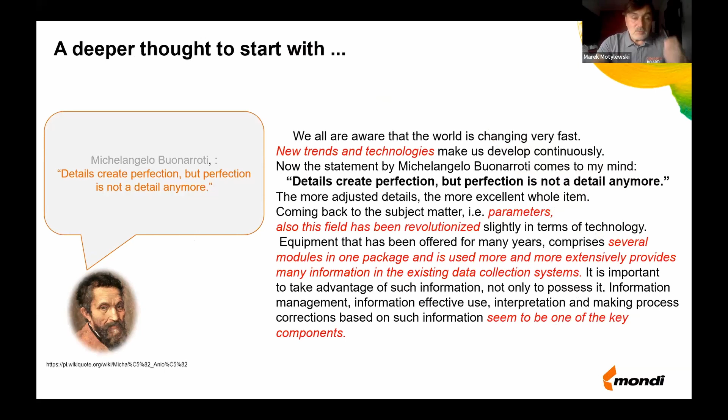Quite often I start my presentation with a sentence which I like very much, written by Michelangelo Buonarroti, that details create perfection, but perfection is not a detail anymore. The more we know, the better we are, more perfect, more efficient, etc. Still a very valuable sentence, good to have in mind, to remember that every small aspect is important, considering a total process, where every detail may create or support us on the way to perfection.

So in this presentation, I intend to share general information with all of you on how to read and interpret parameters in terms of good paper and paper packaging runnability and strength.

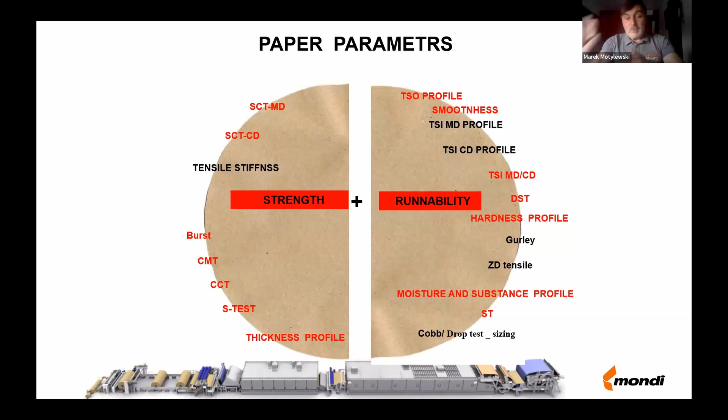On this slide, I put, I suppose, all or almost all paper parameters, and I was trying to divide them. On the left side, paper parameters related to strength, to performance of packaging, and on the right side, the parameters which tell us more or less about runnability. So let's start with the parameters.

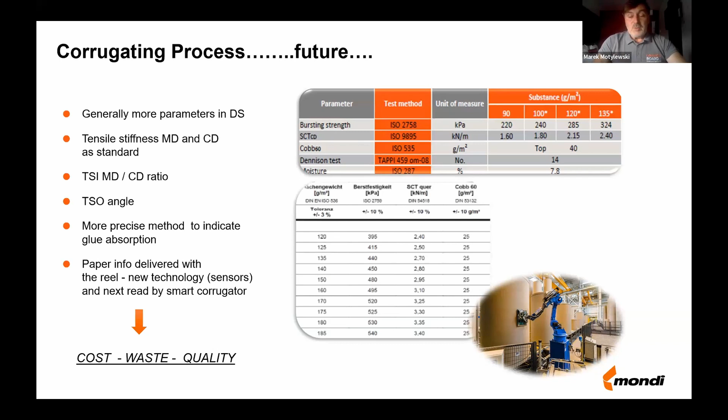And the future, I'm sure about that - the future will, as always, come with new things and new parameters. More complex technical data sheets should be present on the market when selling, presenting paper, to give more information.

Once more, paper parameters - let's talk about some of them. SCT, short span compression test, is the most recognized parameter, I would say, and it's really perfect in case of expressing...

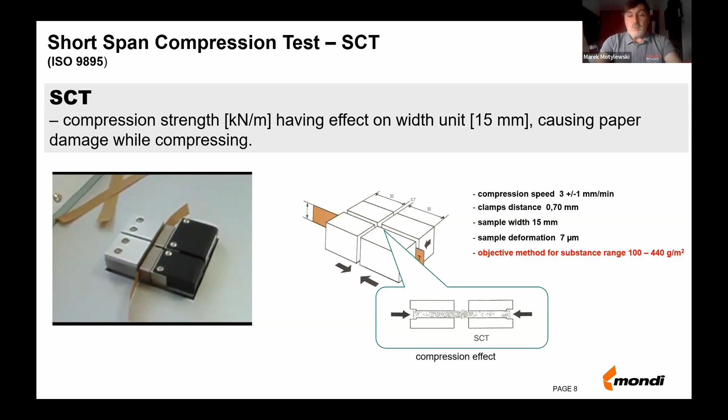Very good methodology because it's covering, as I put on the slide in red digits, a wide range of grammage substances from 100 up to 440.

RCT, ring crush test, is still quite popular, but unfortunately, considering what I told you about SCT, and what I put here on the slide in red digits, this methodology is good as a parameter expressing stiffness, compression, but for higher substances.

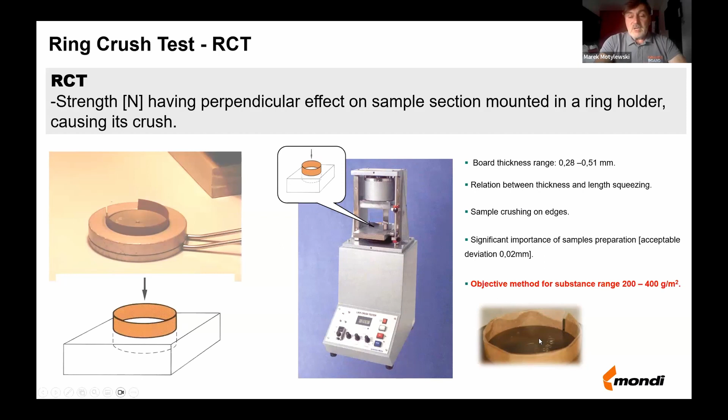RCT correlates with the thickness of paper, so this methodology is good for paper grammage in a range of 200 up to 400. But on the way to lightweighting, more usable, more correct, more precise is SCT, not RCT, because thinner paper creates breaks on the edge of the paper ring, as you see on the photo on the bottom right side. So below 200 grams, RCT is not really a good parameter if someone is still using that.

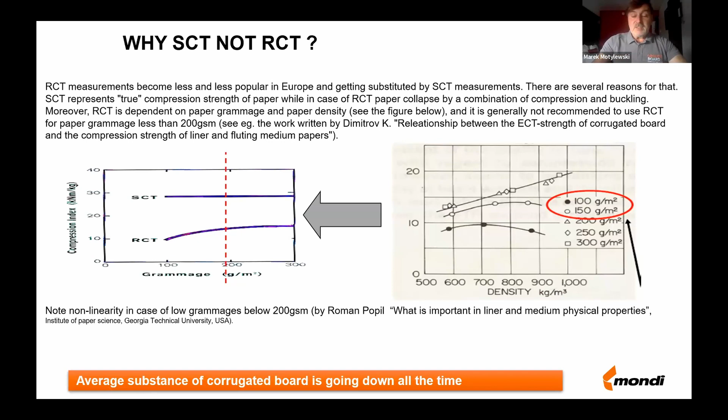If someone is making any prediction of a corrugated board or boxes, it's better to use SCT, short span compression test, not RCT. Tensile stiffness - which I always repeat is the best parameter, I would say, to describe how strong is a paper in case of how strong will be a box - is tensile stiffness, measured in machine direction and cross direction. You see how it goes on a strip of paper, put into the machine, 2 clamps, and paper is stretched. So there's an elongation going on, plus a force, which at a certain moment will make a break of this paper strip.

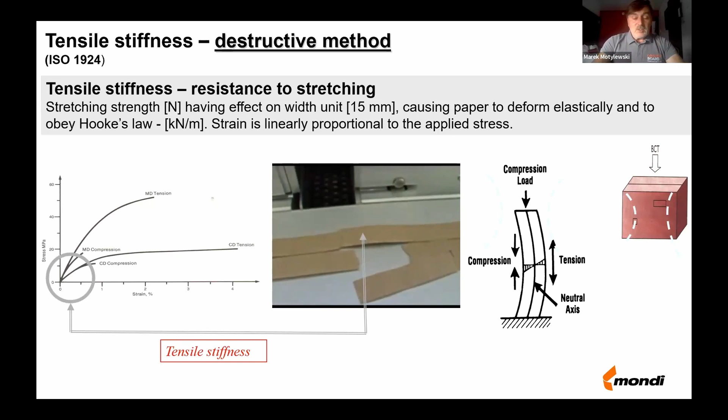So it's an elongation, like elasticity, and the force, which is also a compression. As you see in this drawing on the right side, it's exactly the parameter which shows us very well the case of BCT of a box, where during pressing a box, one side is compressed and the opposite side is elongated - tension is going on. So in this case, compression, tension, elasticity, and the force - tensile stiffness is really the best, in my opinion, parameter covering every grammage and telling a bit more than SCT. Not only pure compression, not pure static stiffness, but also telling us about the dynamic of paper, how high are the dynamic parameters of paper, not only compression.

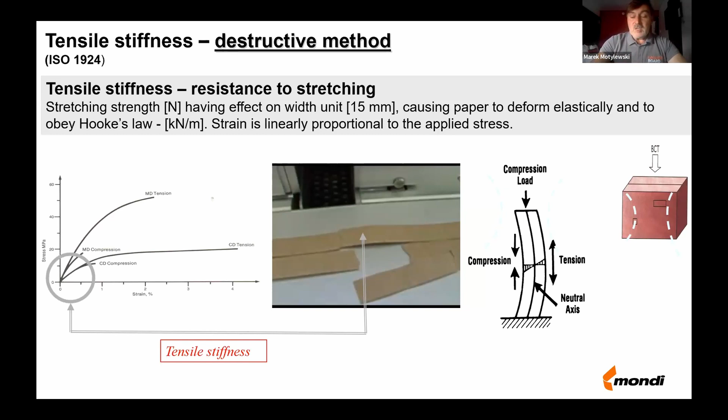Tensile stiffness, machine and cross direction.

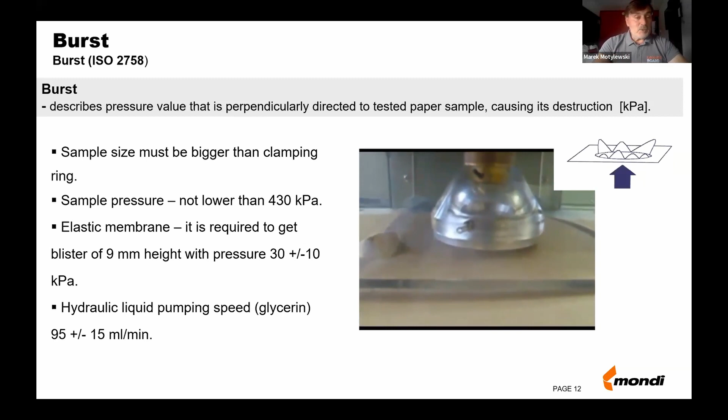Burst - still quite popular, most probably all of you know how it looks like. Still a very simple, good parameter indicating, I would say, content of fresh fibers. It also tells us about the dynamic, not the static stiffness, but the dynamic elasticity. So it's still a good parameter to estimate how strong the corrugated board and boxes will be.

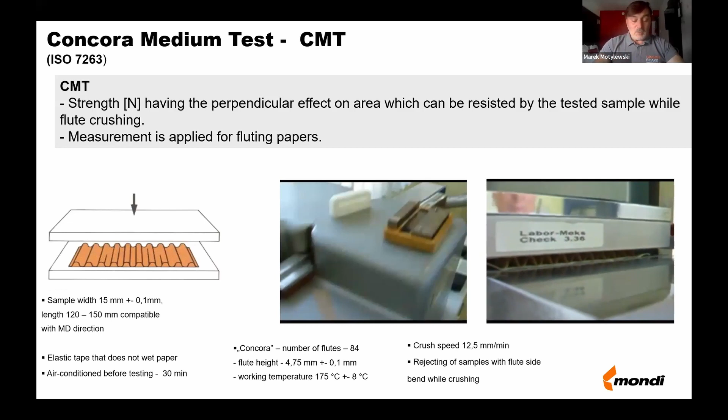Concora Medium Test, so-called CMT, Concora Medium Test - we're just jumping from liners to fluting. CMT, if some of you are doing that, okay, but I would say that is already, in my opinion, a useless parameter. First of all, the methodology comes from the '50s, so it's more than 70 years ago. It's focused on an A flute, which is almost 5 millimeters high. Not so much A flute is produced globally, so it's not really a parameter which is useful, which can be used somehow in any kind of estimation.

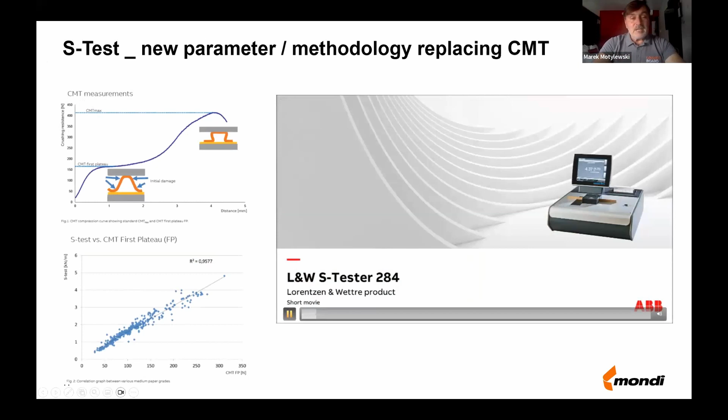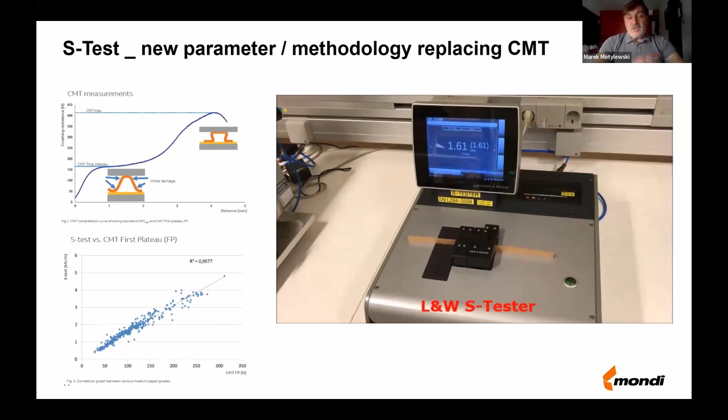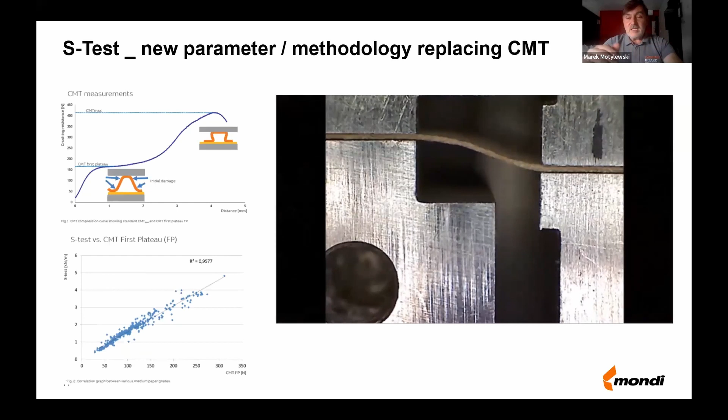In case of CMT, nowadays, or in recent years, a test called S-test started to become more and more popular. It's a new parameter, relatively new - at Mondi we started to use this parameter 3 years ago, and already 2 years ago the S-test became part of our technical data sheet for recycled fluting. First of all, it's very quick - as you see in this short video, it's a similar instrument to SCT, because it's also 2 clamps, 0.7 millimeter gap, and a paper strip is in between the 2 clamps, which get closer to each other when they start breaking the stiffness. Only, as you see very well just now, when a paper strip is tested, it takes the shape of an S.

Because of that, this parameter is called S-test. It has a very good correlation with CMT - not with the total CMT. If some of you are closer to CMT, most probably you know that making a CMT test to crush, to press a flute, which is created on a Concora, involves 3 peaks of performance, 3 times a plateau, so-called, during a CMT test.

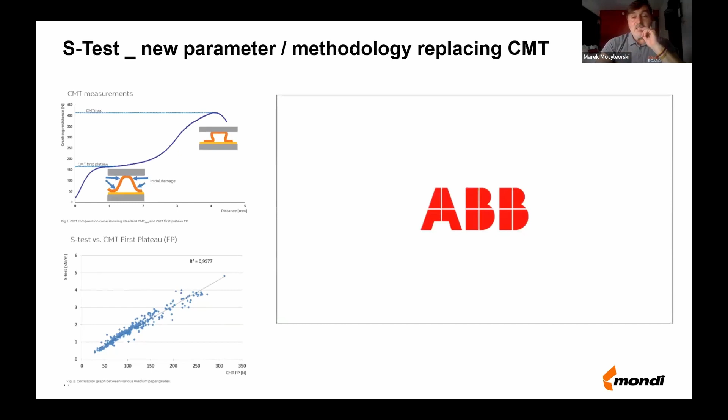So as you see on the bottom graph, that is a correlation between S-test and the CMT first plateau, first peak of CMT. That's a very good linear correlation. As I told, S-test is much faster than CMT, because with CMT you have to heat up the Concora to create a flute, put a cello tape on the formed flute to keep its shape, then put it under a press and squeeze it to get a result. In case of S-test, you just put a strip of paper into the machine and immediately you get a level of S-test.

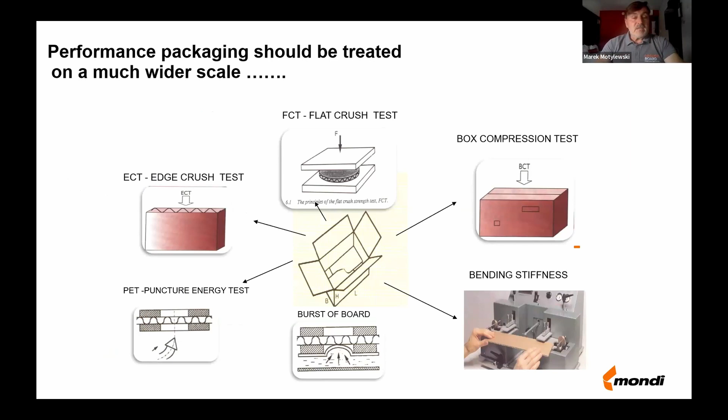Normally considering performance packaging, parameters of board and boxes, we are touching mostly the parameters you see: ECT, FCT, flat crush test, box compression, bending stiffness - not always, but good if it's mentioned - burst, and less PET, puncture energy test.

Shortly, what is this coming from? So ECT, the edge crush test of corrugated board - depends how strong, how high the ECT is, depends on the paper parameters which you see on the right side, which we discussed, which I described: SCT, short compression test. ECT correlates with SCT, or SCT correlates with ECT.

Looking in the middle, bending stiffness of corrugated board - geometric bending stiffness, MD and CD, machine direction, cross direction - depends on the level of tensile stiffness, MD and CD, as I was trying on a previous slide to describe, how complex this parameter is, and that parameter fully corresponds, correlates with the bending stiffness of corrugated board.

And the box compression test, BCT - as you see, I put a question mark on the right side. What decides about BCT? BCT, as you know, is a more complex parameter, so there are more parameters, more aspects which decide about BCT.

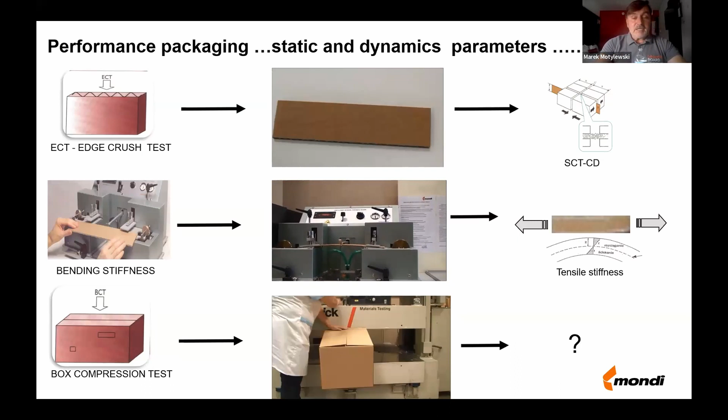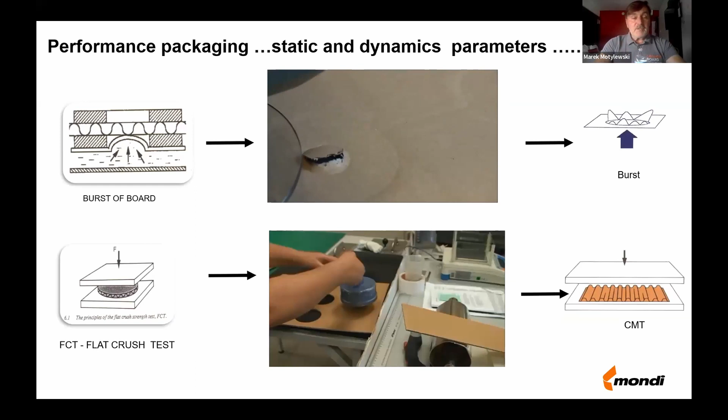Shortly, to complete this - burst of corrugated board uses the same equipment as for paper, only different pressure is used, because corrugated board is a stronger material, so we have to use higher pressure to burst the corrugated board. And the FCT, flat crush test,

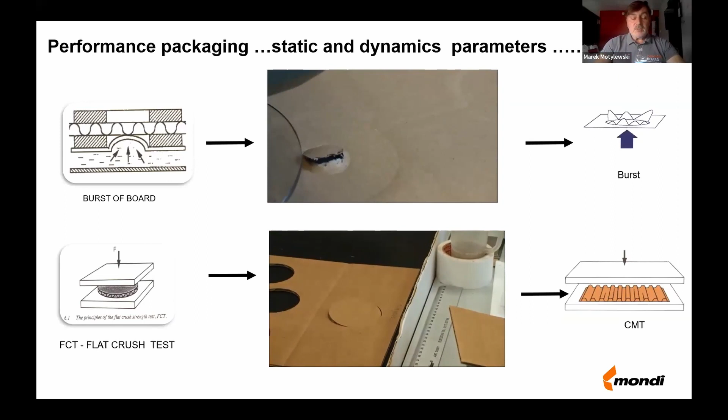depends how strong the fluting is, so it corresponds somehow with the CMT or with the S-test, which I was also trying to describe, to explain to you.

Okay, so in case of paper parameters and their impact on corrugated board, quite often people are saying SCT, ECT, BCT - give me a very stiff paper with a high level of short compression test, that will give me a strong corrugated board, high ECT, and finally BCT. It's a very simple, let's say, performance packaging way, which I don't like, which is not a complete definition of performance packaging.

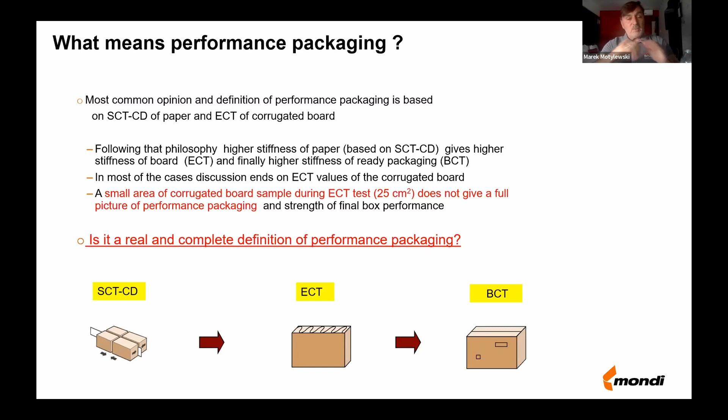First of all, let's consider that the ECT test is based on a very small piece of corrugated board, just 25 centimeter square, 10 centimeter length, 2.5 centimeter high. So it's only a small piece of board, which does not give a full picture of performance packaging and strength of the final box performance.

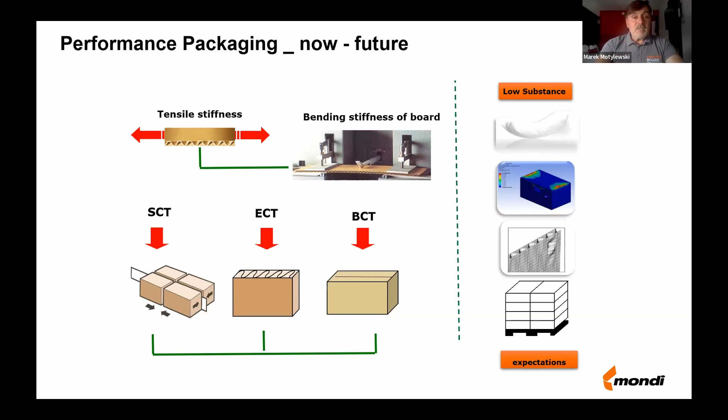It means the expected BCT of a box.

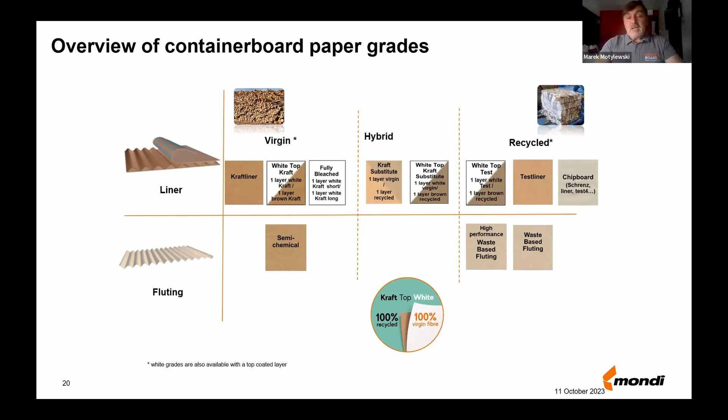Mondi is, by the way, a leading producer of hybrid papers, considering both versions, brown and white.

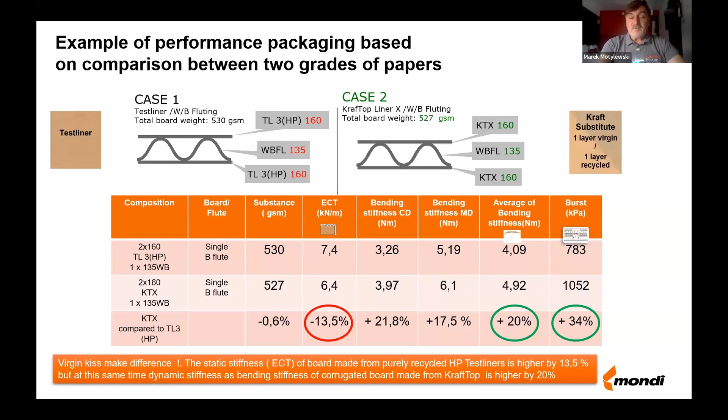But considering partly virgin papers, the bending stiffness, geometric bending stiffness, was 20% higher than recycled, and the burst was plus 34% higher than fully recycled HP. So that gives me proof that, okay, that's only static stiffness compression that's much higher ECT, but considering dynamic bending stiffness and burst, that is a plus for hybrid papers with some virgin fiber content.

We also did a BCT test, and that was the opposite. In this case, ECT, as you remember, was lower for the partly hybrid paper, but in case of BCT, where we put a box under a press and push that down, so it's dynamic, coming with the elongation, the tension.

So that was not so much, but that was a significant difference, that the BCT was higher on the hybrid papers, and also this deformation was slightly longer, which is clear, virgin fibers are more elastic than fully recycled.

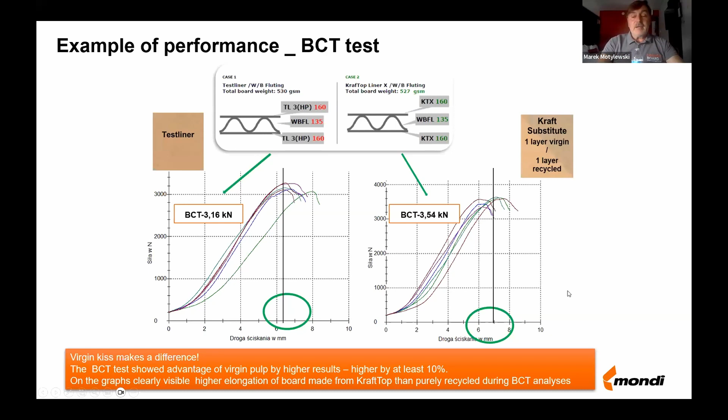So all in all, summary: what means performance packaging? It means correlation of parameters and how strong the corrugated board and the boxes are. So it's not only SCT to ECT, but dynamic parameters should also be considered, tensile stiffness of paper, and bending, geometric bending stiffness of corrugated board.

So all in all, performance packaging is a bit complex, it cannot be treated only based on SCT or only on tensile. It always has to be more in balance, and more aspects have to be taken under consideration.

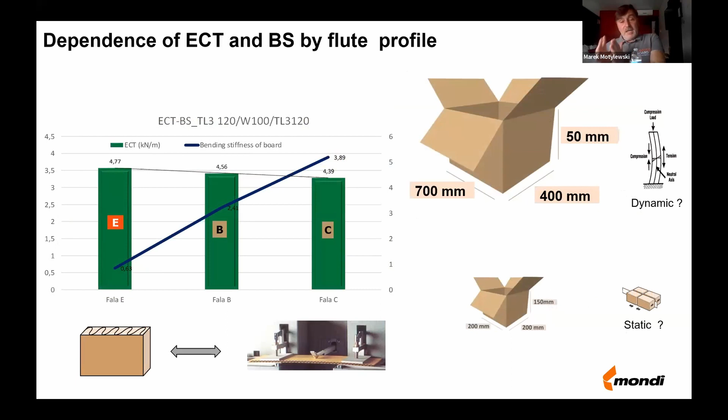So that is somehow a summary of the first part of the presentation, the correlation between paper parameters and strength of corrugated board and the boxes.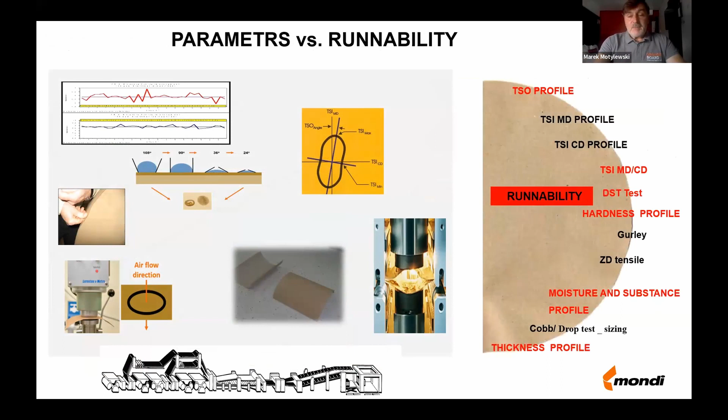So now, second part, related to parameters versus runnability. I will try somehow to describe parameters in a runnability context. Runnability cannot be measured in laboratory.

Really? No, maybe it can. It can. It means, knowing the level of a few or several parameters, we can easily say about runnability of a paper grade in the aim of end-use application.

So considering runnability, what is important? Equal moisture, that we know, equal moisture and substance without variations across and in machine direction, thickness also, no variations across, sizing of a paper, porosity, air permeability, strong bond of paper.

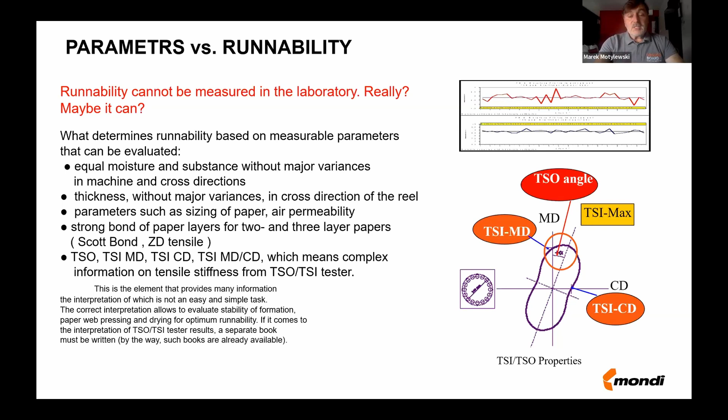Most of liners, let's say 99%, are 2 or 3 layer papers, and it's important to have good internal bonding between the top and bottom layers, so Scott bond, tensile, and also more parameters like TSO, tensile stiffness orientation, tensile stiffness machine direction, tensile stiffness index cross direction, the ratio between machine direction to cross direction, etc.

That everything is possible to check, to measure, and that tells us more about the runnability of different papers. And knowing more, we come back to the starting point, a sentence of Michelangelo Buonarroti: knowing more, our prediction is better, we are more perfect.

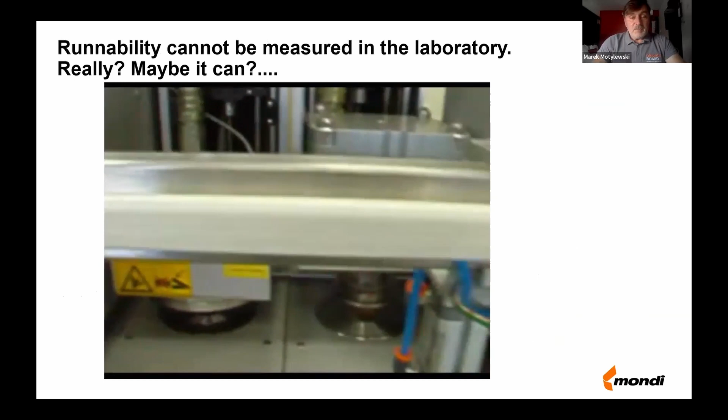Nowadays, in a paper laboratory, which is also slowly coming to the corrugated side, we have a testing machine which is so-called autoline.

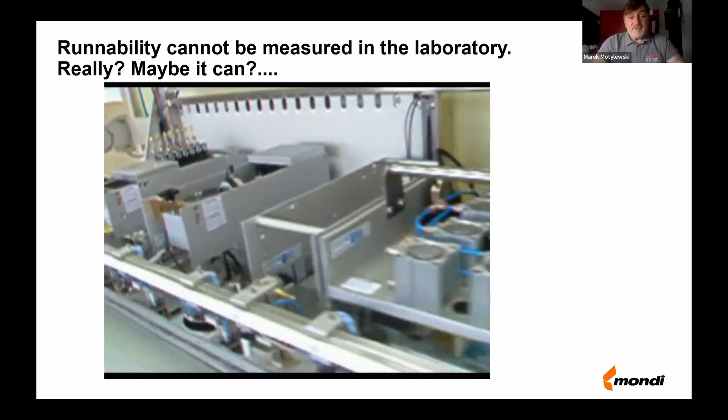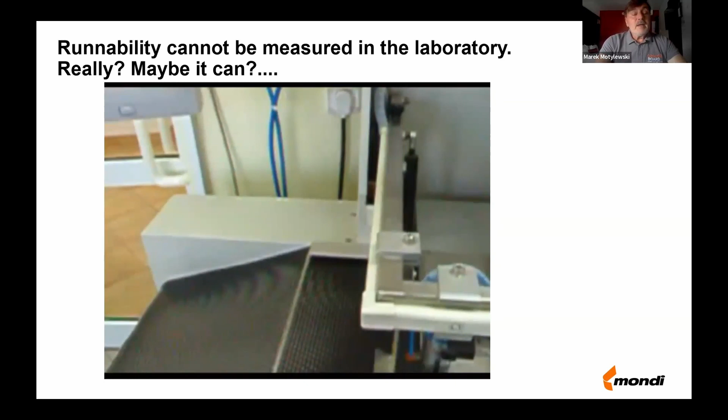A few or several instruments under one cover, depends how much money you want to spend. Paper is going through, paper is tested, and there's automatic data transfer to the system. Parameters like burst, TSO, SCT, tensile stiffness, everything is measured. It can be physical and ultrasonic, so destructive, non-destructive checks.

But all in all, there are several parameters which are possible to check, and those parameters are telling us about the runnability.

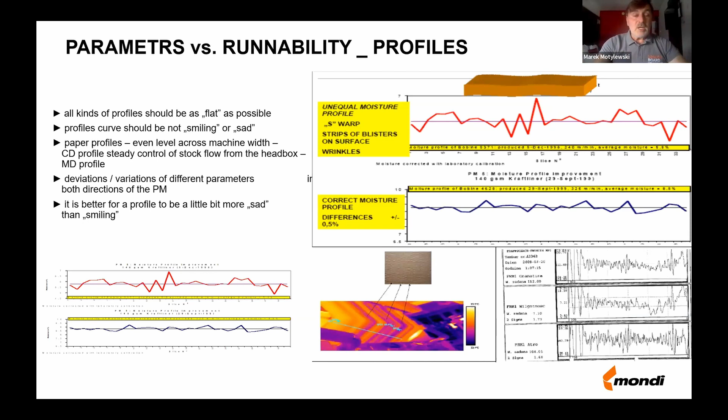The profiles, moisture, substance, thickness profiles should be as flat as possible. The profiles should not be smiling shape or sad shape. It is better for a profile if they are a bit more sad, going down, like a down warping, not like a smiling, up warping shape. That is always a bit better when its shape is a bit sad, not smiling.

Also moisture in machine direction matters, because quite often we only consider profiles across. But also moisture in machine direction, for unwinding, converting a reel on a corrugator, is important. If the profiles are okay, but moisture in machine direction is representing a different level - let's say starting to unwind a reel is 10%, and at the end of the reel is 6% - that's a huge difference. That will be completely different warping, starting and ending with one reel.

So this moisture profile, with a maximum variation of plus minus 0.5, means that the moisture profile should be in a range within 1% across, the same related to machine direction. Also in machine direction, moisture variations should be not higher than plus minus 0.5, within 1%, not more.

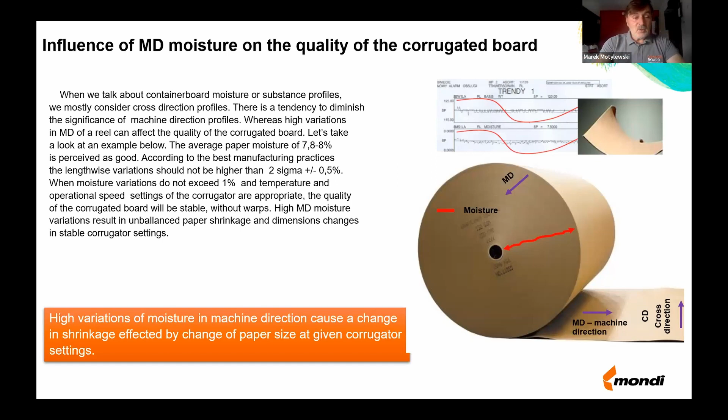In case of proper runnability, it means getting a flat corrugated board at the end. What do we know from the TSO profile? Tensile stiffness orientation profile, which is just a result itself, is telling us, is showing us, the angle, the positioning of the fibers across a paper reel.

The fibers in a perfect paper should be put in machine direction or cross direction, but it's never like that. Always some fibers are put on the wire and later on paper, positioning a bit left or a bit right, which is expressed in an angle. So TSO is telling us an angle - plus 4, plus 5, or plus 10, minus 7, etc.

And if this TSO angle is too high, side to side, if it's higher than plus or minus 5 degrees, that quite often creates a twisting warp of the corrugated board, a kind of warp which you see on the photo on the right side of the board.

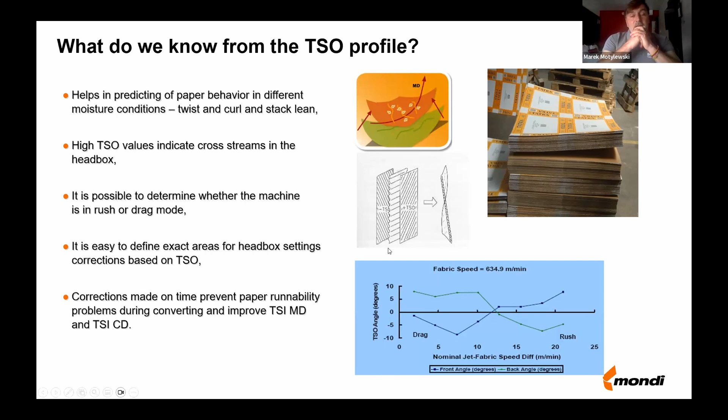TSO, so far you cannot easily find it, or it happens sometimes - some producers are indicating a TSO level in the technical data sheet, but it's really good to know, because that very well indicates what we can expect in case of flatness.

Knowing precisely the TSO from every reel, you are able somehow to make some corrections. I mean, if you have reels with a minus angle, and you put that reel on a single facer and want to compensate with plus TSO, plus angle, you put it on a double backer, the paper will compensate each other. I'll put it here a bit like a mathematical calculation.

If you take two reels, like liners - outside, inside liners - with minus TSO, it's like minus 4 plus minus 4, you will get minus 8. So you will intensify the twisting warping. But if you know precisely, you can put one plus, one minus - example, minus 4 plus 4 is 0. So one reel will compensate the other and will give a more flat or flat corrugated board.

So more information gives us more solutions.

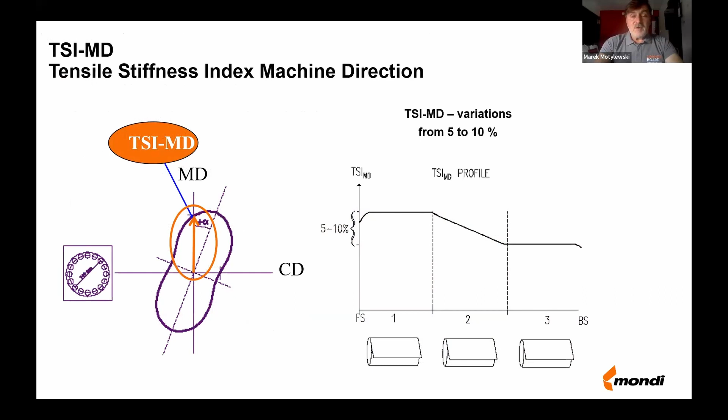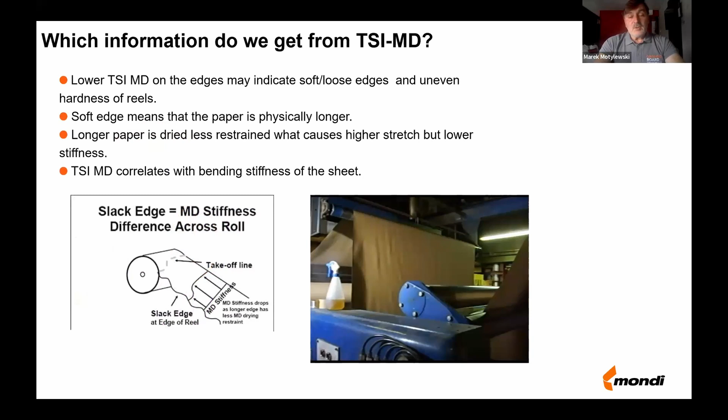Tensile stiffness index, or tensile stiffness machine direction profile, indicates to us if a paper reel's variation of TSI MD is too high, which can tell us that there can be a problem with flop, with a loose edge from one side. So in this case, the TSI MD profile variation should be not higher than 5 to 10%, which tells us that we have a chance not to notice any slack or soft edges.

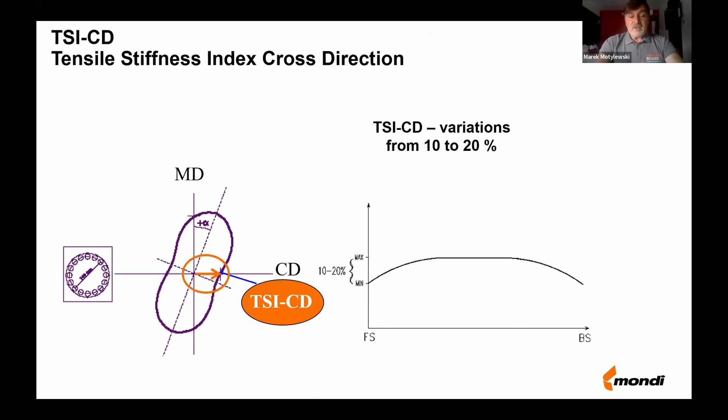The same with the TSI cross direction. In this case, recommendation is that the variations should be not higher than 10 to 20%. Tensile stiffness generally is, as I already mentioned, a very complex parameter in case of prediction of strength

of corrugated board, but also in case of runnability. Most of the cases, it's a non-destructive parameter. It's just based on an ultrasonic pair of sender and receiver going through the paper, giving us the level of TSI CD, TSI machine direction, cross, etc.

Also the ratio - I mentioned that it's important, or relatively important, to know the tensile stiffness machine to cross direction ratio, MD to CD. Why? Because as you may know, paper itself may have a higher or lower tendency for warping, up or down. And how do we know which paper has a higher or lower tendency for warping? The MD to CD ratio, tensile stiffness index MD to CD - this can also be SCT ratio MD to CD - is indicating which paper is a bit better in case of warping.

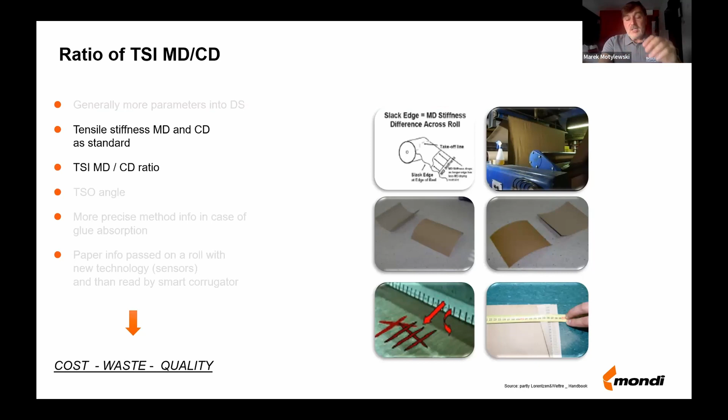Lower ratio means a more flat corrugated board produced based on such paper. Lower ratio is better for runnability. So all in all, TSO wants to avoid a twisting warp.

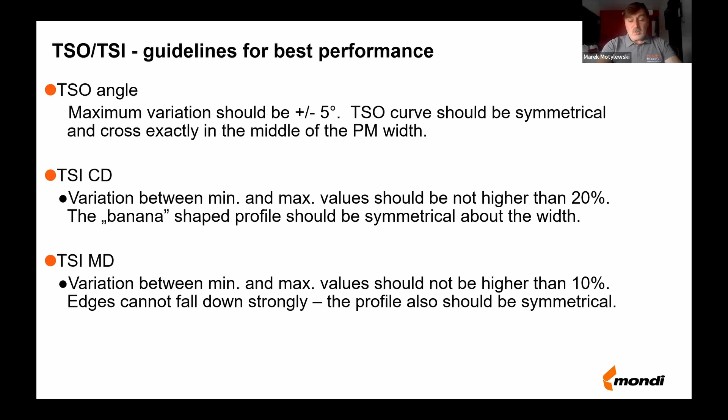Maximum variation should be plus minus 5 degrees, not more. When it's over plus minus 5 degrees, that can indicate that the reason for a twisting warp is the paper. TSI cross direction variation not higher than 20%, and tensile stiffness index profile machine direction not higher than 10%. That is the guideline for best performance.

Sizing of paper - quite often a corrugated board producer is thinking sizing is important. We know how much paper is absorbing glue during production on a corrugator, or how fast it is absorbing ink.

But if you consider the absorption of water during the 60 seconds, both papers had completely different behavior. This gray paper was absorbing much less at the starting point, going up later with absorption. The second paper was absorbing quite fast and a lot during the first second, then slowed down. So Cobb 60 is giving us information on how much water paper absorbs after 60 seconds.

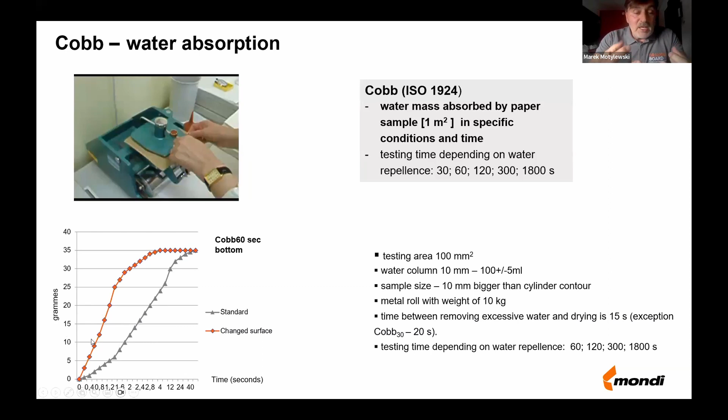Do you need information on how much paper is absorbing water after 60 seconds when glueability on a corrugator happens within a second, and printing is sometimes happening within a millisecond? We need, in case of printing or glueability, information on the paper's characteristics in absorption of glue or ink within the first millisecond or first second.

So nowadays other parameters, like contact angle, or the one I like most, PDA - penetration dynamic analysis - tell us perfectly what the absorption of a liquid, glue or ink, is during the first 2, 3, 4 seconds. This information is most efficient for considering our processes. So in the future, PDA will be more used than Cobb 60, which, once again in my opinion, is completely useless.

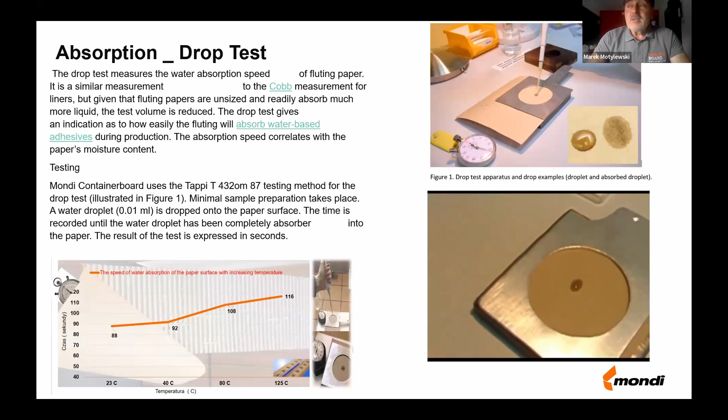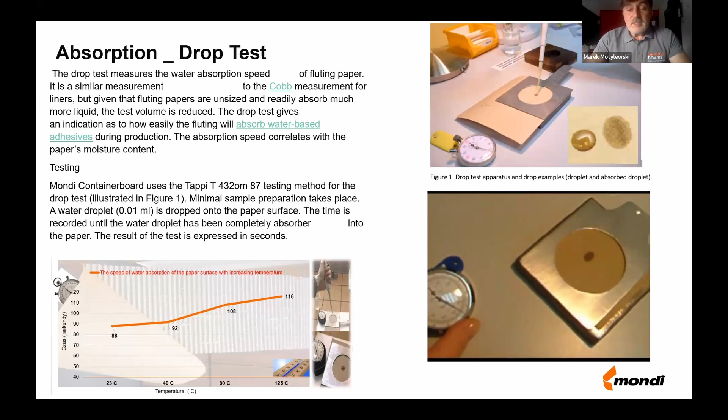A very simple drop test, which you most probably know, is always quite good - quite good to quickly express what the differences are between papers. Putting just a drop of water on a paper surface and measuring the time when this water is absorbed, eaten by the paper, when this water mirror disappears from the paper surface - that's a matter of seconds, a few dozen, and that's still quite good.

Paper delamination, which also from time to time creates a problem. As I mentioned, every liner is a 2-3 layer structure, so it's important that the internal bonding between the top and the bottom is quite strong. One of the best parameters, I would say, is Scott bond, measured in joules per square meter, telling us how strong the internal bonding is between top and bottom.

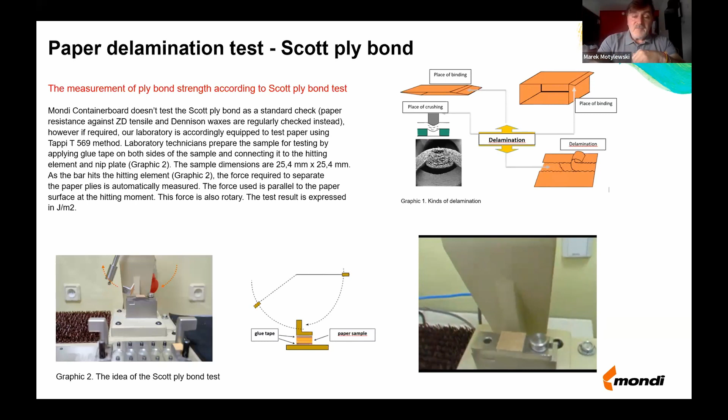Cello tape, two pieces of paper, pendulum just touching a sample of paper, making a break between the layers, and the force needed to break this internal bonding is a level of Scott bond, expressed in joule per square meter. Much faster and relatively good also is something called ZD tensile.

It's a bit of a different story. You may have a look at the animation on the bottom right side, because during a Scott bond test the pendulum is going from one side touching the paper. In this case, it's a Z direction.

In case of delamination, it's also important to know what kind of raw material was used for the paper. We use softwood and hardwood, meaning longer or shorter fibers. Good to know, because with shorter fibers it's a bit more difficult to get a proper bonding. It's easier with softwood.

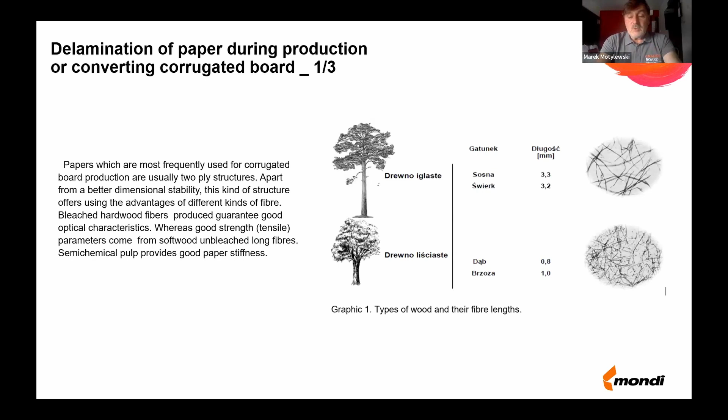We should also keep in mind what kind of paper it is: is it fully virgin white top kraft liner, fully or predominantly virgin brown kraft liner, or kraft top? Kraft top hybrid paper is a good example, because it's a combination of virgin and recycled fiber, which makes it quite difficult to get a proper strong internal bonding. It's always a challenge.

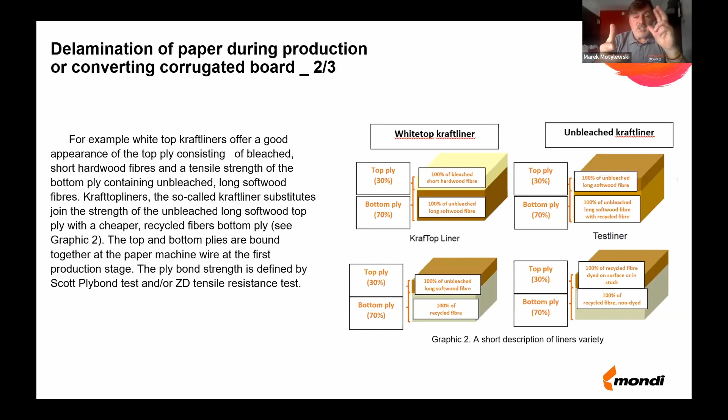So when converting such paper, we should keep in mind to treat it a bit more delicately than fully virgin paper, because the impact of temperature and glue absorption creates a weakening of this internal bonding. So it's good to know whether it's fully virgin, predominantly recycled, or fully recycled, etc., because that has an impact.

On that slide I also wanted to express the impact of converting on a corrugator, specifically temperature and glue absorption. Getting back to the different kinds of paper and raw material, with shorter or longer fibers, when temperature goes up the layers shrink differently. Softwood shrinks more than hardwood, or virgin fibers generally shrink more than recycled.

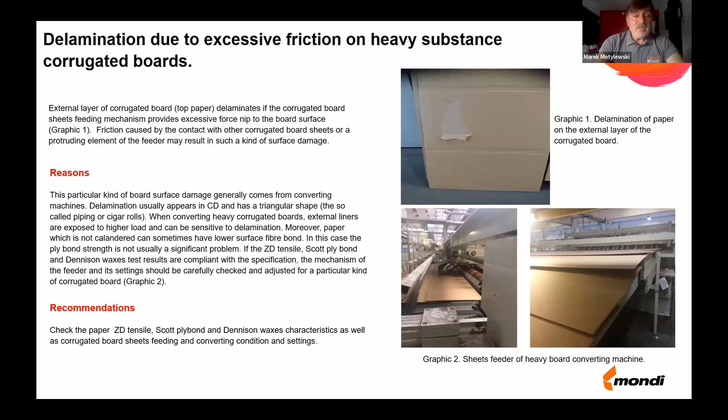That creates tension between the layers and a weakening of internal bonding, which may cause delamination of the ready corrugated sheets. This kind of delamination, so-called cigar or local delamination, mostly appears on heavy-duty corrugated board with higher substances. It can sometimes be due to the settings on a machine or feeder, but also due to not high enough internal bonding between the two layers.

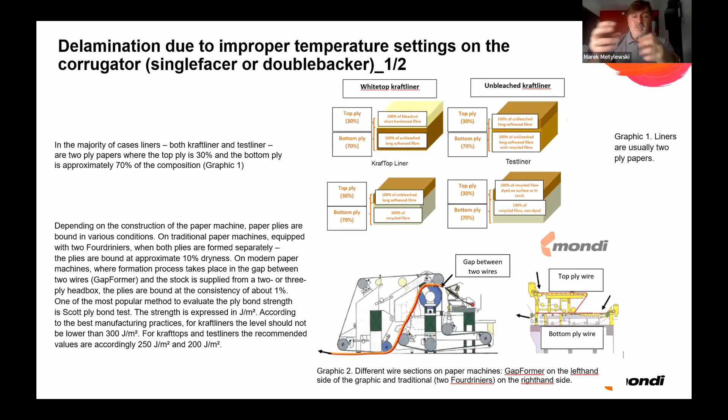Sometimes on a paper machine, the paper is not produced fully properly. For me, it's good to know as a paper maker that we have different kinds of paper machines and different kinds of wire sections, because internal bonding is created on the wire section where wet layers are bonded to each other. So we have standard two Fourdrinier machines, and more and more paper machines based on a gap former. These things have an impact on how strong the internal bonding is.

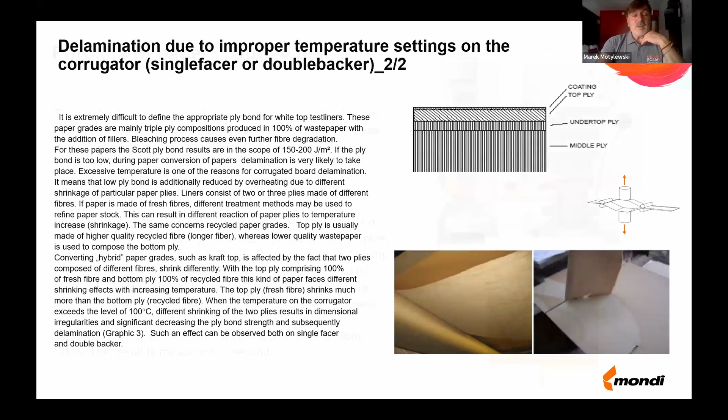The weakest papers in terms of internal bonding, where delamination appears quite often, is white top test liner—fully recycled, with very degraded fibers, because the bleaching process is also involved. Quite often white top test liner has three layers or even four, so internal bonding is not so high. Scott bond is often below 200 joules per square meter. So it's good to know that this paper is the weakest in terms of risk of delamination.

I have to speed up a bit. Porosity of paper, mostly Gurley. Most popular is Gurley, also Bendtsen, but the most popular is Gurley.

It's also important in case of runnability, knowing if paper is more or less open. Very simple methodology telling us how much air. Gurley is telling us directly how many seconds it will take for 100 milliliters of air to go through the described area. It's just a cylinder which is pressing air through the paper.

Shorter time, fewer seconds, more open paper. Longer time, more seconds, paper is more closed, density is higher.

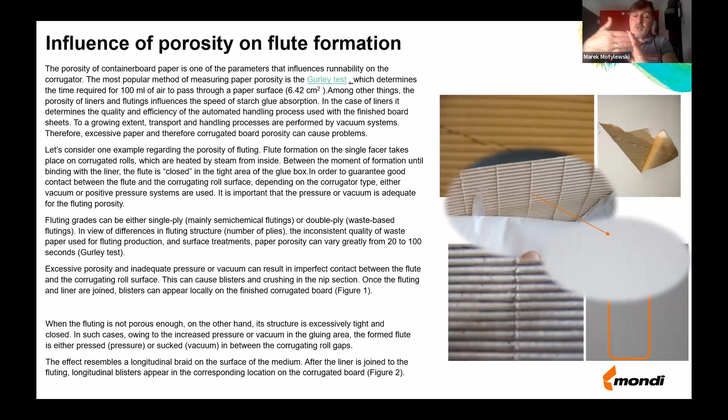I put here an example of what most of you working on a corrugator, on a single facer, have probably seen quite often - this kind of strip on a formed fluting that also quite often correlates with porosity. Nowadays there's a lot of paper which is treated, including fluting, which has a lot of starch on the surface. It means paper is very closed. When it's coming into a corrugating roll, where the formed fluting is kept on corrugating rolls by overpressure or by vacuum, when paper is very closed, it creates a high pressure or high vacuum level, and paper is pressed into slots on the corrugating rolls. That's what you see on the photos.

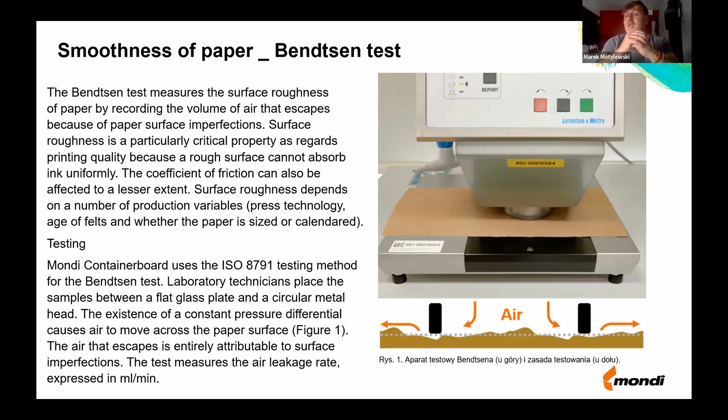It's also important in case of runnability. I'll give you a simple example: a smooth paper versus a rough paper. Smooth paper has better contact with the surface of preheaters, with the surface of hot plates, so transfer of heat is much faster to corrugated sheets made with a paper of very high smoothness. More rough paper, more unevenness, means lower contact area with the heating plates. So it's good to know - with more smooth paper, heat transfer is faster, so we can keep a bit lower temperature if possible. In the opposite case, with very rough paper, say 3000 milliliters per minute, we have to give a bit higher temperature.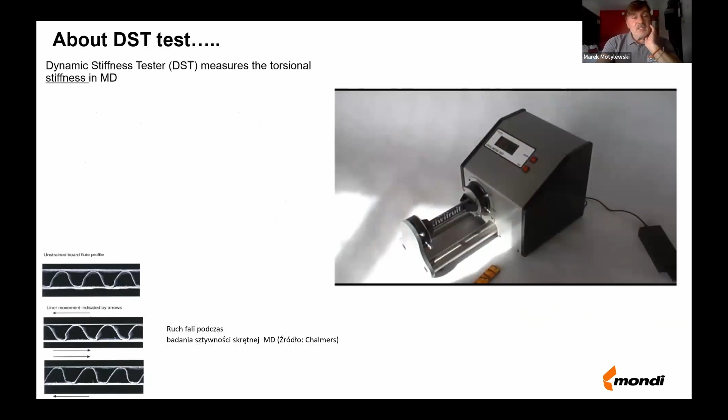DST, dynamic stiffness test, also called quite often the Chalmers test or torsion test. It's something relatively new on the market compared to other parameters. It's just a torsion test, putting a piece of corrugated board through twisting.

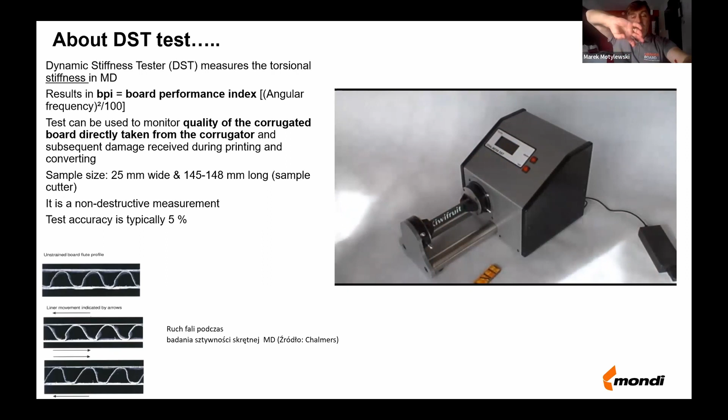You will see that on a video - some of you most probably know it. Following the description given by the producer, the twisting - because it's just a twisting - one left, right, left, right, left, right.

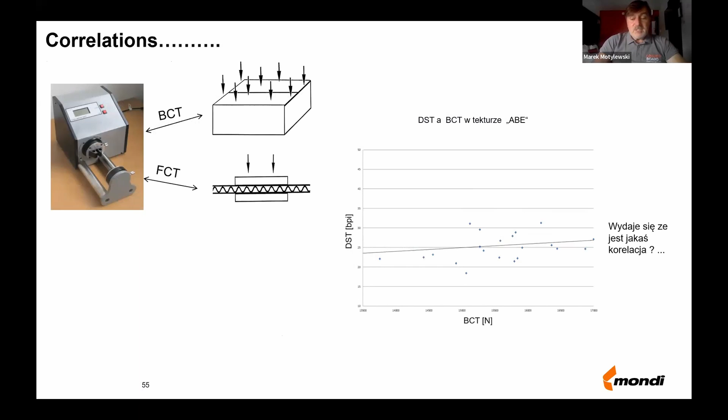It seems to be a good parameter, and the producers have mentioned there's a good correlation with BCT and FCT. I would say, yes, that's true. We did - one of my customers in Europe did a really long study based on this methodology, based on that instrument.

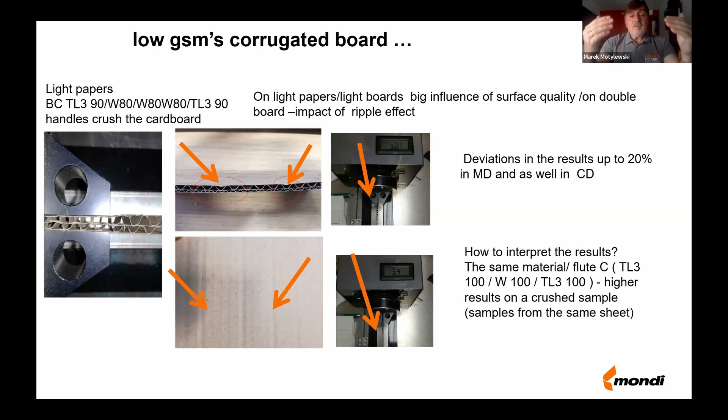All in all, it's a relatively good methodology for describing the corrugating and box process in case of printing, crushing, pressing. It's a good parameter, good methodology for mid or higher grammages, for heavy duty, kraftliner, semi-chem - but it's completely not precise for lightweight recycled papers. For a low grammage recycled corrugated board, the variation of results can be up to 20%, so it was impossible to get any proper conclusion.

So all in all, again, it's a good torsion test. Dynamic stiffness tester is good to describe how corrugated board and boxes have been produced in case of crushing for higher grammages, for stiffer papers - not for lightweight. That's the summary.

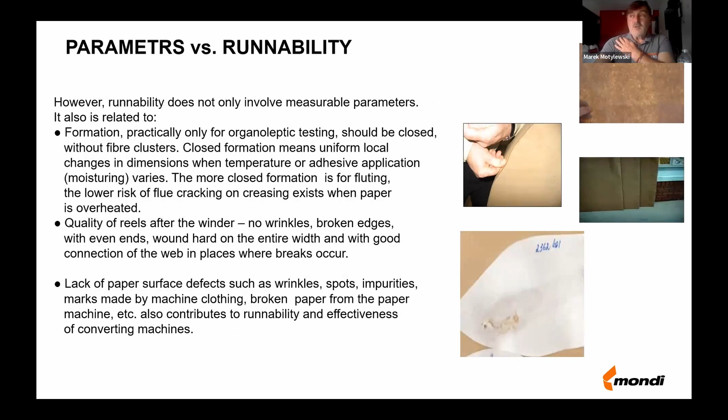Parameters versus runnability - sometimes not everything can be measured. Sometimes something has to be checked in an organoleptic way.

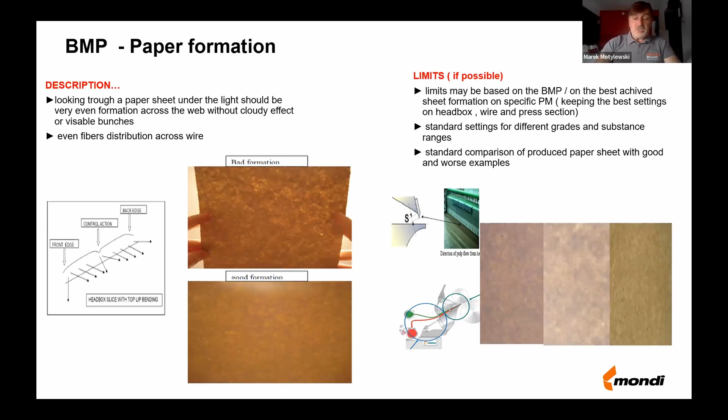Paper formation - it's a very simple story. It can be better or worse, meaning more even or uneven, with very uneven, cloudy formation showing some bunches of fibers. In most cases we look at the paper under a light, saying it's very good or not so good formation. When it's really very bad formation, in the case of liners, glue can be absorbed unevenly across the surface, creating some leakage points or blisters. If not leakage points, it can create faster blisters on the surface of the corrugated board, as you see on the photo.

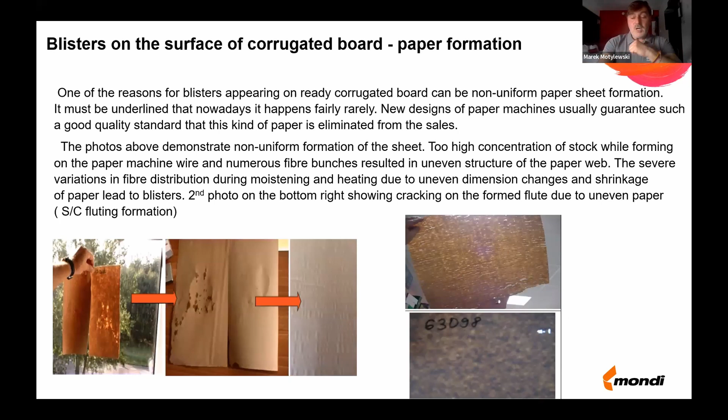In case of, for example, semi-chem fluting, you see here very terrible formation when this fluting is coming between corrugating rolls, especially semi-chem can start to crack on top.

Surface finishing, considering best practices, is something we cannot really measure. But in case of surface finishing or surface cleanness, we can simply say, as a summary, that all surface defects visible by the naked eye disqualify the paper. That's all. If something is on the paper, impurities, dirt, or whatever, that disqualifies it as a good quality paper.

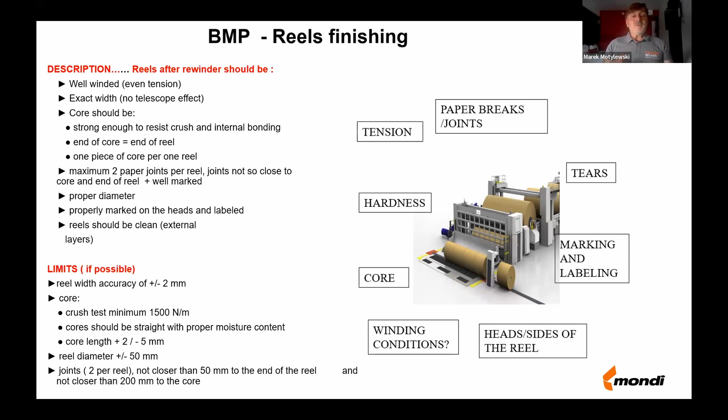There are a few words on the end, or reel finishing, which is also an operation going on after the paper machine, on a rewinder. So a lot still depends during that process on operators, to get very well wound reels with even tension, and in case of paper breaks, the breaks have to be properly bonded and glued together to avoid later problems on a corrugator.

In case of parameters and runnability, coming to the final summary, I would propose a very simple exercise which I did a few times with some of my customers in Europe. It's some estimation of how to get runnability, how to say this is good runnability paper, that is not good runnability, it's not a good paper in case of runnability.

I did the exercise checking parameters: TSO profile. All of you have 3, 4, 5 or more paper suppliers, so let's take samples of all of them in some paper grades, and let's check TSO, profiles, sizing, even Cobb, SCT, burst, TSI if possible, the ratio SCT or TSI, MD to CD, which has influence on warping, up or down warping, plus a simple rating by operators.

It's good to make a simple survey across operators on a corrugator, asking what they think about Kraftliner Mondi, Krafttop Mondi, or Smurfit Kappa, Westrock, or Klabin, or whatever, just to make a scale from 1 to 5, and put that into the table too.

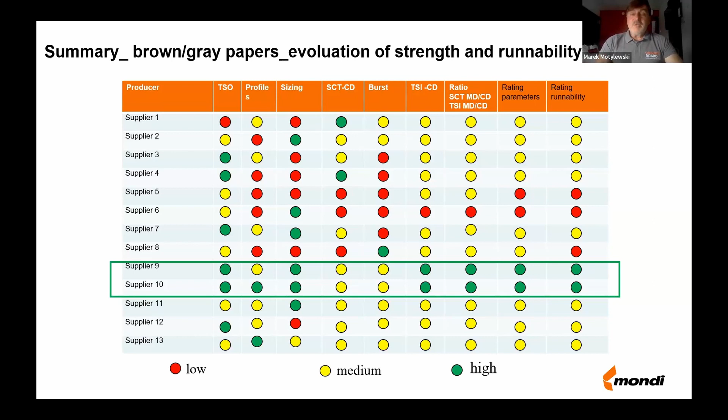So you see one example, several suppliers, parameters, and opinions of operators. This gives an answer: supplier 9 and 10 seem to be the best in case of parameters and runnability. So maybe it's good, from time to time, to make this evaluation to be able to say which seems to be the best paper in case of strength and runnability.

That's just in graphic form, the factors affecting runnability and effectiveness of converting machines. Once again, I put at the bottom a few groups: reel finishing, sizing, surface finishing, formation, profile, and pluses and minuses, what has a positive and negative impact on efficiency on the corrugator.

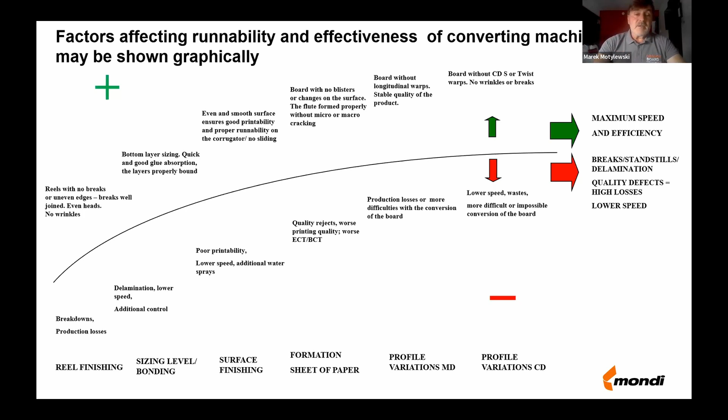What that means is that we are measuring much more, and we are giving you, as a data sheet, only part of the parameters which we are measuring on every jumbo reel, on every production order. So we are not passing everything. And not only us - I'm saying the wall is generally between paper makers and corrugated board producers, and the future will bring a change.

So the corrugating process of the future, quite simple to say, also a slide from a different presentation. First of all, we will pass more information to you inside a paper reel based on some sensors. Nowadays sensors started to be relatively cheap, so we can pass much more, not only burst, SCT, grammage and sizing, but also TSI, TSO, all kinds of measurements we are doing.

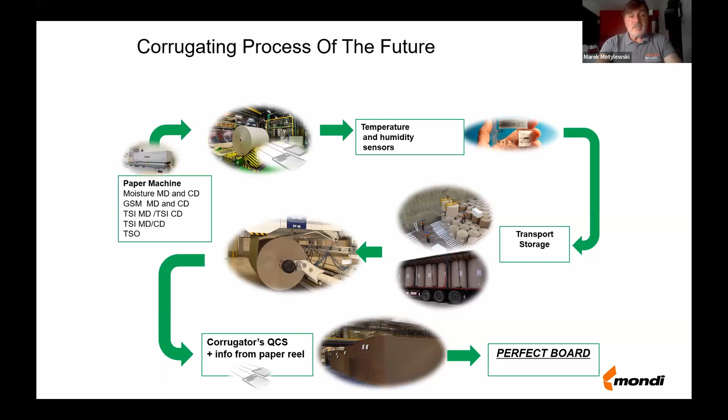And that, also on the way, paper reels - the sensor is monitoring two parameters, temperature and humidity. After that, when a reel comes to the corrugator, a new corrugator just reads all these parameters and creates proper settings, or gives operators information about the reel regarding several parameters, which lets operators make better settings, and the final result will be a perfect board.